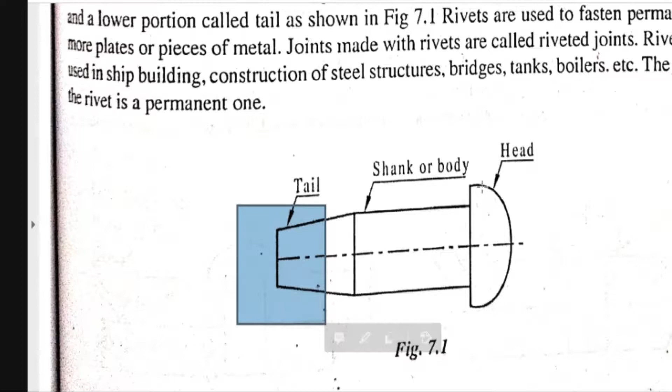Then whatever that punch, we call that one as a punch, shaping punch. One side will hold by using punch only. That shape exactly resembles the head.

Similar, whatever the square like, similar like punch is used. And another side also we are going to use one more punch, having the curve similar to that of the head, curve like contour, and you are going to apply the load this side. Then obviously whatever material is there, this will assume this portion, curved portion.

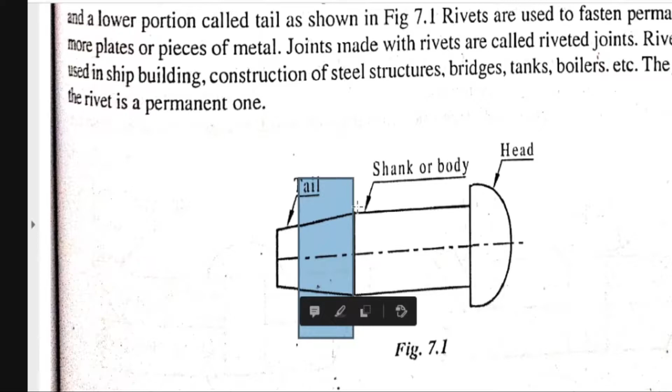So both sides, the diameter of the tail side will increase as the length reduces. So cross-sectional area becomes like this, up to this. Obviously the whole size is d plus 1, but this cross-section is more now.

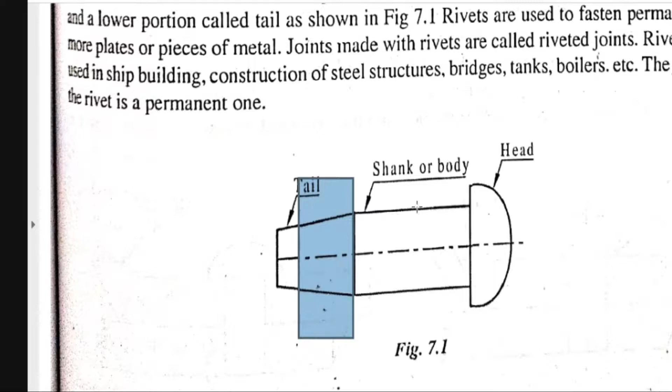So the both the plates will hold together tightly. So this is the concept regarding the riveting. Which type of fitting it is? Is it easily removable? No, it's not easily removable type.

If you want to remove the both the plates, whatever you are going to hold between these two ends, if you want to remove the plates from that, then either this end or this end you need to break by using the chisel and hammer. You need to cut any one side head. Then you need to remove the plates.

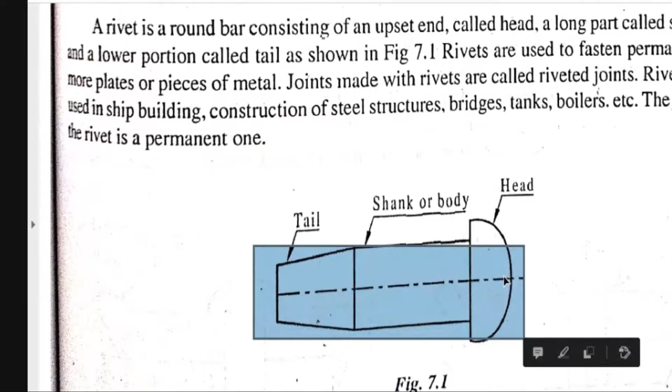So we call this one as a fastening with destruction. Once you cut this one over, its life is over. Means this rivet's life is over. You need to break it and remove the components. So we call this one as a permanent type fastening.

Permanent type fastening. What are the temporary fastenings? Temporary fastening is nothing but imagine two plates are there, like a water chamber, or your cycle or two-wheeler or four-wheeler nut and bolts. What are the nut and bolts?

See, nut and bolts, you can release the nut, remove the bolt, disassemble the components. Then once again you can assemble the component by tightening the same nut and bolt. Means the same nut and bolt, same components can be released and joined any number of times without any restriction.

We call them temporary joints or fasteners. While rivets, welded joints, and soldering joints are the permanent joints, permanent fastenings.

If you want to separate the two components which are welded already, then you need to use a chisel and cut the welding, or you need to heat the welding with the help of the welding rod, keeping very high voltage and bringing the rod near to the welded portion, then heat will increase automatically and the joint will release.

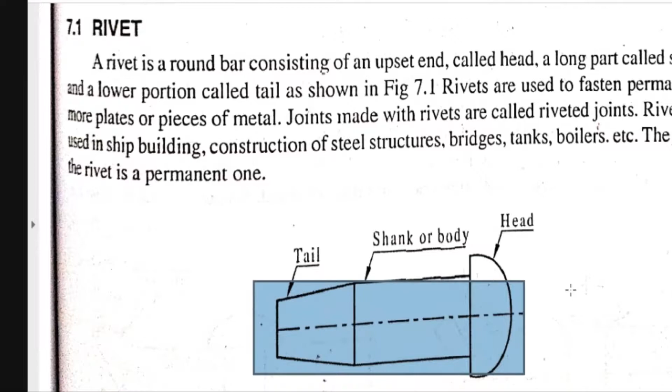Means what, we are going to break the joint and separate the components. This is one method. So we call riveting, welding, and soldering as the permanent joints, and nut and bolts, screws, are the temporary joints. We can remove and connect any number of times; that's called a temporary joint or fastener. So this is about the background.

Now see the process of riveting. Two plates are to be held together. We need to join both plates with the help of a rivet. First, we have to drill one hole on both plates, and both plates have to be held axially with the center coincident.

Then the lower backup bar or die is to be placed. The original head is there and the rivet is to pass through this one. Whatever tail is there, you are going to place the die on the upper side and apply the pressure. When you apply the pressure, until this die touches the plate, it will move down.

When it moves down, this material occupies whatever gap space is there, and finally you will get the component like this. So this is a process of riveting.

This is a process of riveting. You can ask me, sir, where can riveting be found actually. A good example will be buses and trucks. Whatever body is to be prepared, bus or truck body, there you can see the rivets, and even the bottom of that bus will be prepared with rivets.

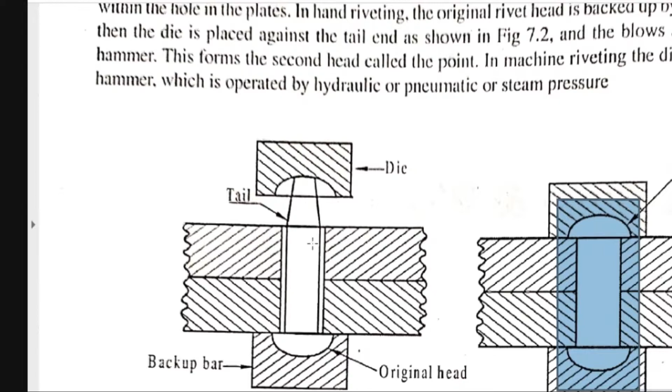So we need to prefer riveting in maximum cases. And as compared to nut and bolt, riveting is so easy.

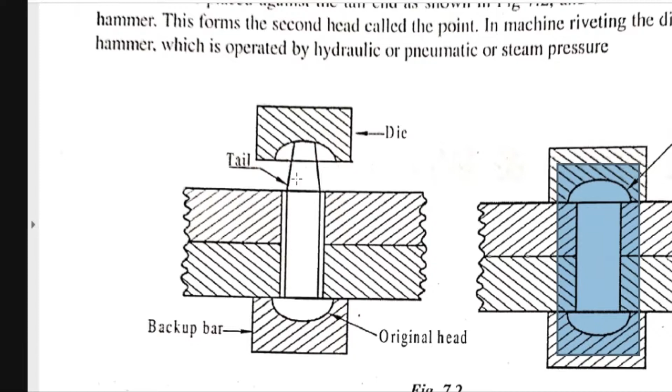A good example I will provide you: the number plate. Attaching the number plate to your new bike, front side and back side, that is actually done by riveting only. We can say that is a riveting. A special type of rivet is used, and by application of force, we drag the components, and finally we cut so that the rivet will fix.

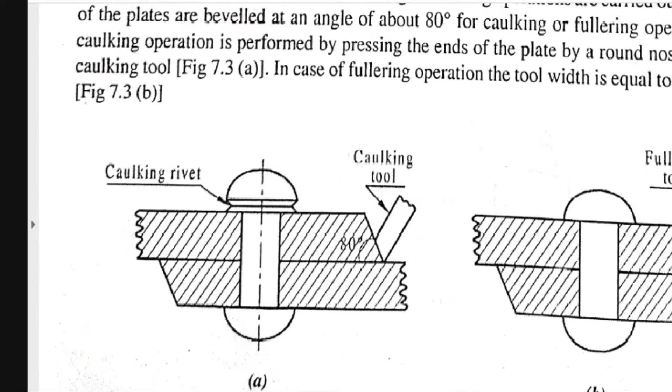Caulking and fullering mean what? We caulk by applying pressure here, and fullering means we need to tighten it using this fullering process. That is not of much importance, let it be.

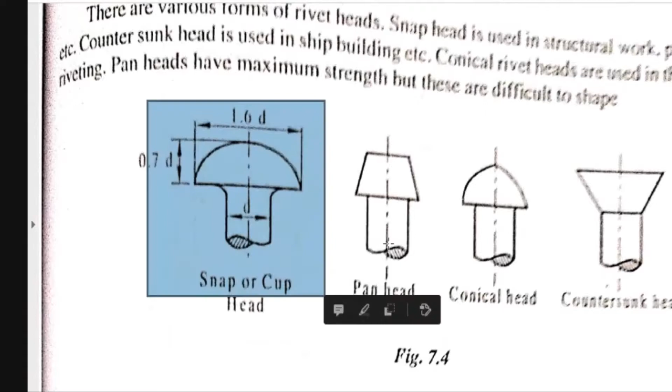Rivet heads: snap or cup head, pan head, conical head, countersunk head. These things are already studied in CMD, computer machine drawing.

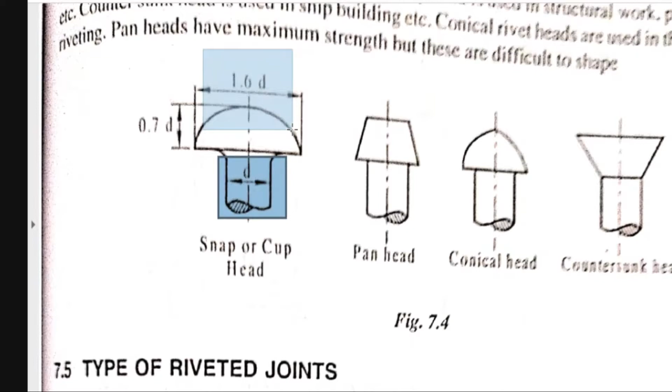But here you have to remember one formula: 1.6 times of D. It is not half of D, remember, it is not half of the D. It will be D or in terms of D. If it is D, yes, it is 1.6 times of D, and it is less than a half circle. So you have to take 1.6 times of D here and take the center, which will be away from it. So the height will be 0.7 D.

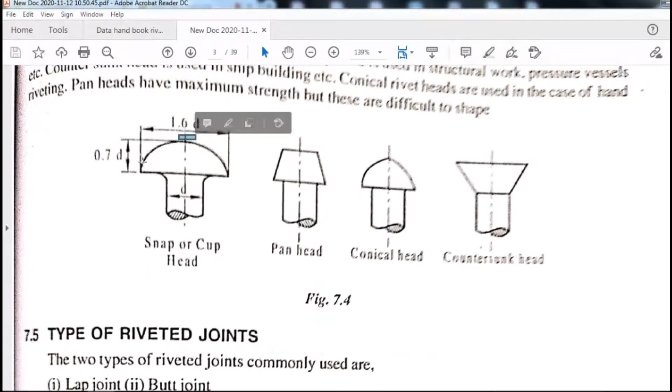Take 0.7 D and you need to draw the figure using the 3-point arc method.

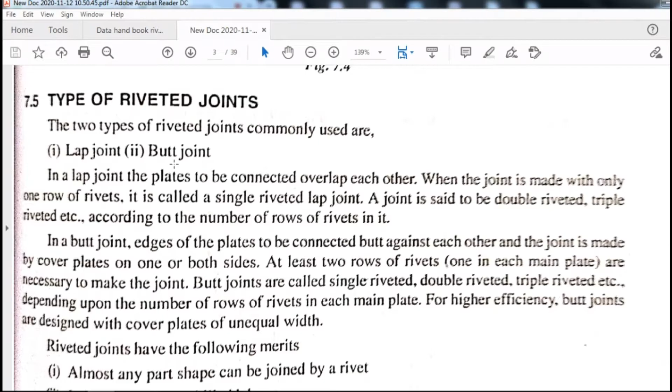What are the types of riveted joints? Generally, there are two types of riveted joints: one is the lap joint, another is the butt joint.

Dear students, in a lap joint, one plate overlaps with another. This is one plate, and this is the second plate. Both the plates will overlap with each other, the first plate and the second plate.

In this case, what happens? When we need to join both plates, just take your hands, keep one hand and over that another hand. Obviously, if you want to join both, you need to cut a hole in between both the plates. This is unlimited, you don't know the end, but you know the end here. At this end, you have to show a 10-degree inclination, meaning if this side is 10 degrees, the opposite side is 80 degrees, totaling 90 degrees.

So with respect to vertical, 10 degrees, and with respect to horizontal, 80 degrees.

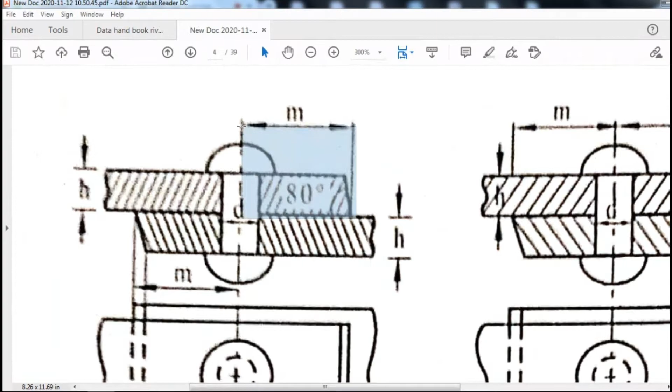From the end point of this one, we call this the margin, M. The thickness of the plate will be H. Diameter of the rivet shank will be D. About this one, as already studied, 1.6D width, 0.7D height. This is about the specifications of the rivet.

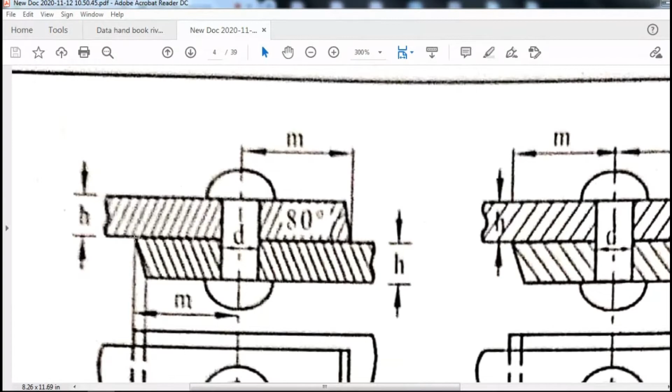Similarly, the rivet on the below side is also 10 degrees with vertical and 80 degrees with horizontal. Same margin, everything same. This is a front view, sectional front view. You can say this one is a sectional front view.

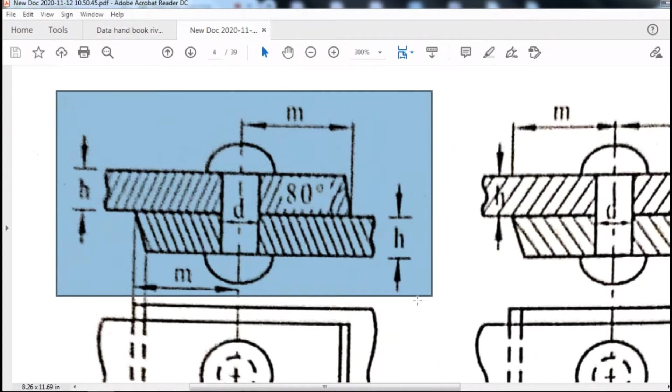What about the sectional front view, the top view? See, this is your top view. See how many rivets are there.

Whatever line is there with respect to this cross section, only one rivet is there, so only one row is there. So we call this single riveted, single riveting. In single riveting, minimum 3 rivets you have taken in this row. You can take 4, 5, it's left to you, but at least you have to take 3 rivets.

Another important thing is this upper plate. The upper plate will be clearly visible here with dotted lines and thick straight lines. See, this one is the upper plate. You can see the upper plate like this. It is about the upper plate, so all edges can be seen clearly. But for the lower plate, whatever dotted line is there, you can't see that lower plate edge, the inside edge.

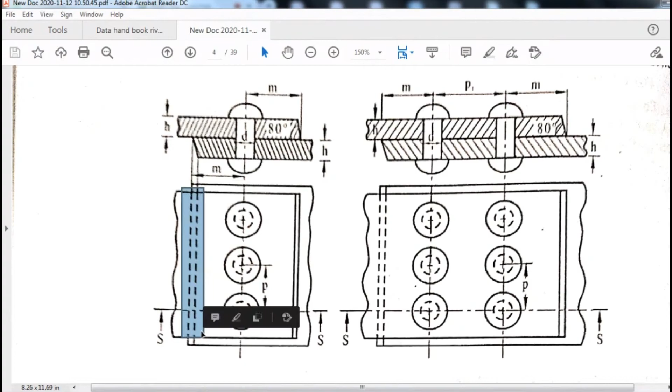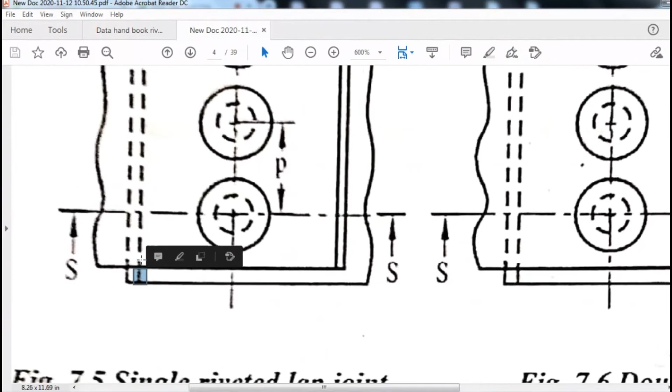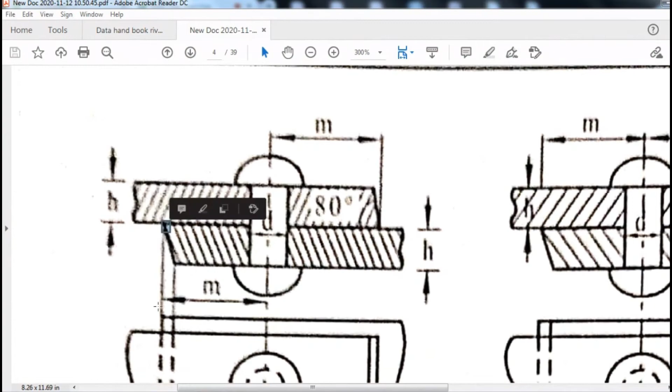If you go in depth, if you extend this one further, this line is also dotted. I'm showing this: this line is also dotted because, if you see from the top, if the lower plate is extended beyond the upper plate, see, this is up to here where the lower plate is, and up to here the upper plate is there. Beyond that, the lower plate is there. But if you see from the upper side, you can't see this lower edge, but you can see this upper edge. This edge, only when extended from the upper plate, will be shown extended.

So whatever the lower plate is there, only the front edge you can see. The behind edge, you can't see that because when you see from the top.

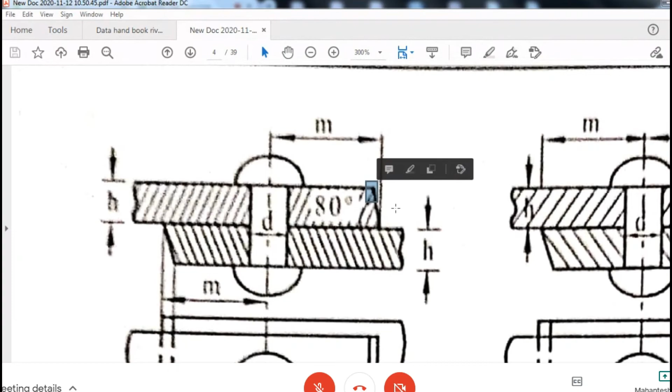But in this upper plate, what happens? See, this is the upper plate. You can see from this upper side, the upper edge, upper corner as well as lower corner. So we can draw the double line here, a thick continuous line. You can see like this. So this is about the upper plate and lower plate.

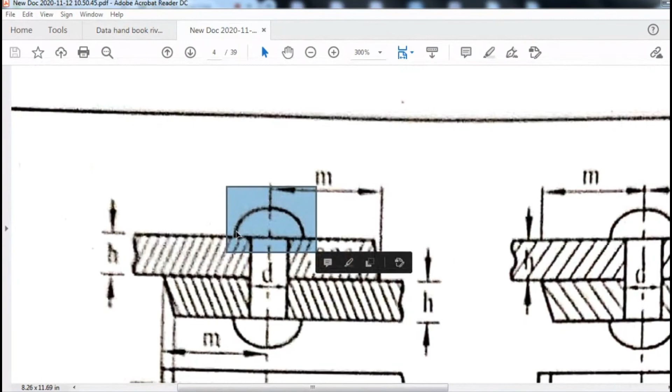Now you can ask one question: why are inside dotted lines there? The reason is that whenever you view from the top side, this portion will appear as a circle, with a maximum of this diameter. This circle, so we are going to draw this circle.

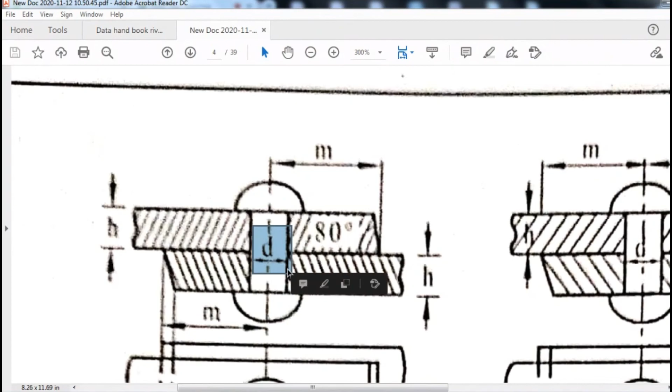Next, under this material, there is a reduction in the cross section. What is this? This is the core diameter or rivet diameter d. So that rivet diameter d will be the dotted line. This is the concept behind this one: full thick line and dotted line.

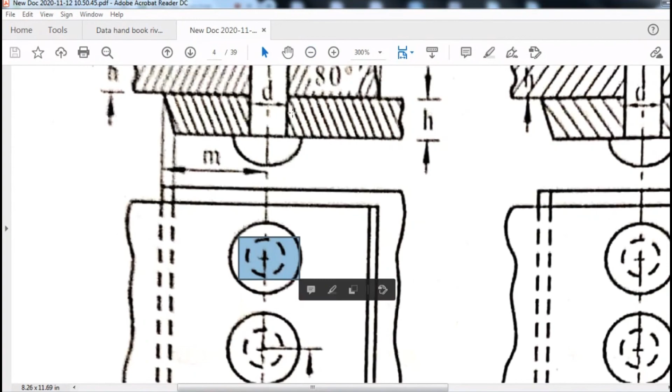So I hope all of you got how to draw the front and top views of the single riveted joint.